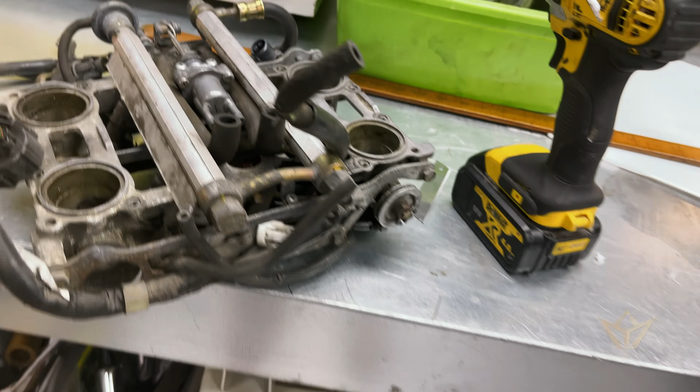Okay, we're at a turning point now with this VFR. I replaced the wax idle, which I thought could have been faulty. It just wasn't settling down in idle, so I picked up this throttle body. There was only one on eBay. Picked this one up. Luckily, the wax things you can see here, you can see they both rise, but one rises slightly more than the other. You can hear the idle now sits absolutely spot on. You can now get on with restoration. Absolutely spot on.

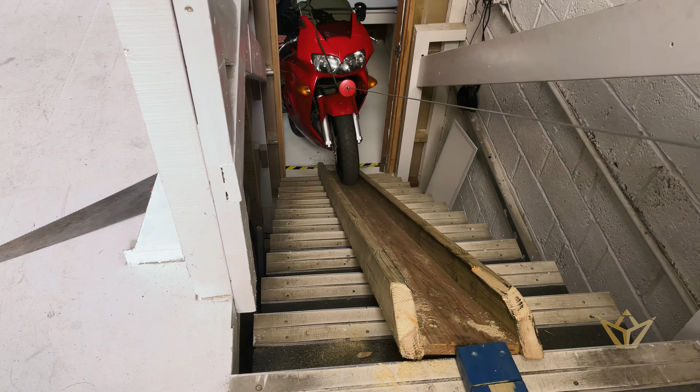This VFR is now up. There's a bit of a drama getting it up the stairs, but we've got it. So with this one, we're going to start the restoration. We're going to take the panels off, and then we're going to take the panels from the other VFR, which are there, and the tank and all that, and then we're going to do restoration all in one hit.

So while I'm doing that, I'm going to go into this one and change the oil, do the spark plugs, do all those bits, check the chain, all that sort of stuff, brake calipers, fluids, and get this bike ready to accept the new panels. And then that should be the restoration done for these two motorbikes.

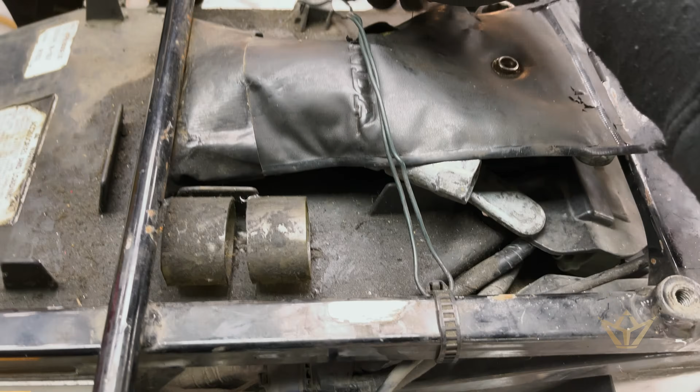So hopefully there are no horrible gremlins in here. I'm not expecting issues. So if I complain, then you can hold me to it. But I think this one should be as expected. Since 2000 it's been ridden a lot, so there will be some things worn, but we expect that. That's a bonus.

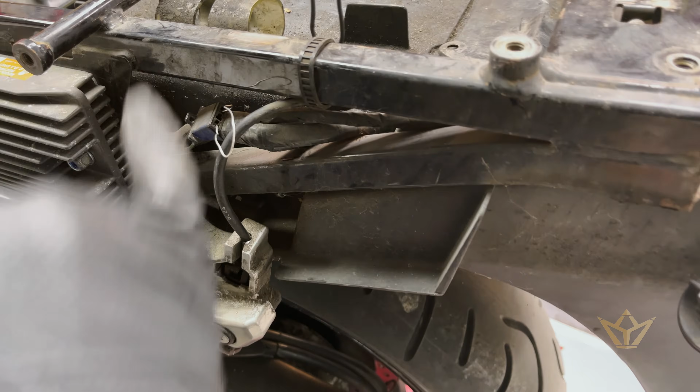Alright, I'm just going to do a code check, see what this bike's history is, and we'll clear them, and then we'll turn the power on again and see which sensors are causing any problems. One, 2, 3, 4, 5, 6, 7, 8, 9, 10, 9.

So to clear the codes, to check the new ones, we're going to turn the ignition on, quickly come here, in about 5 seconds, take one side out, put it back in within the 5 seconds, and then the FI light should flash. If it flashes, it means it's cleared the codes. I turn the ignition off, take the pin out, turn the ignition back on again, and we should see whatever we see. So there's the flashing light.

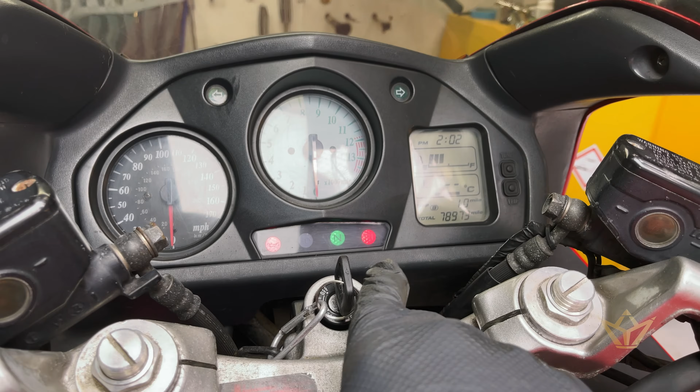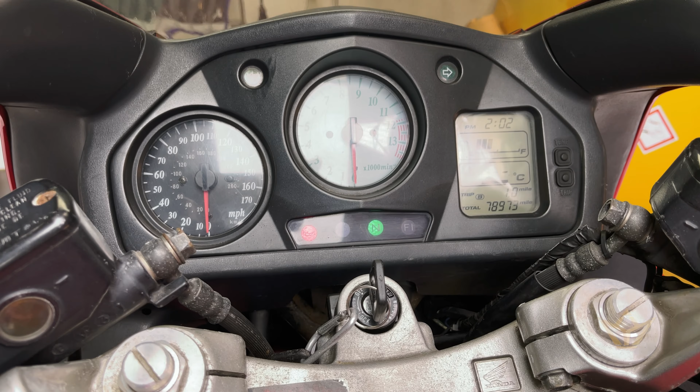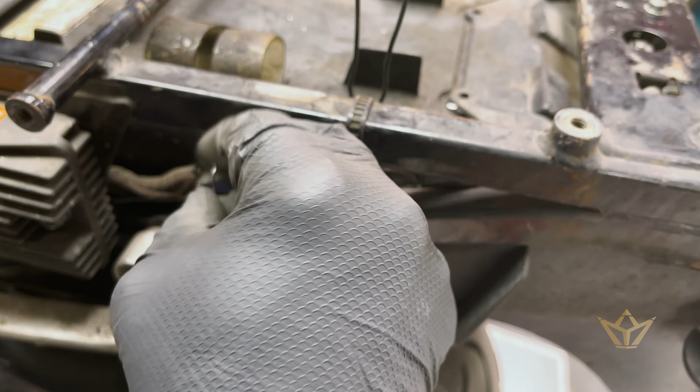So we turn the ignition off, take the pins out, and let's see what codes we have. Alright, that's cleared. So now we put the pin back in again to read what new codes we have. The error codes only show when you check the service indicator. People forget that. Unless it's a very bad issue, this is what we do to check to see where they have error codes. Right.

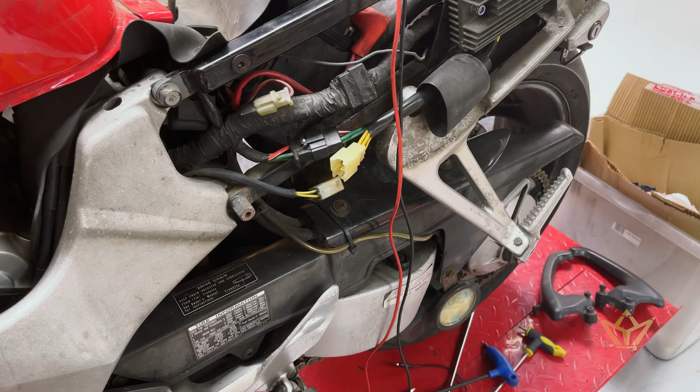Let's check now. Okay, there are no error codes. That's great news. This bike is good. Cool. But I'm just going to check the state of the stator, because on the other VFR this is still fresh in my memory, so I'm going to share this with you. We're going to do a continuity check.

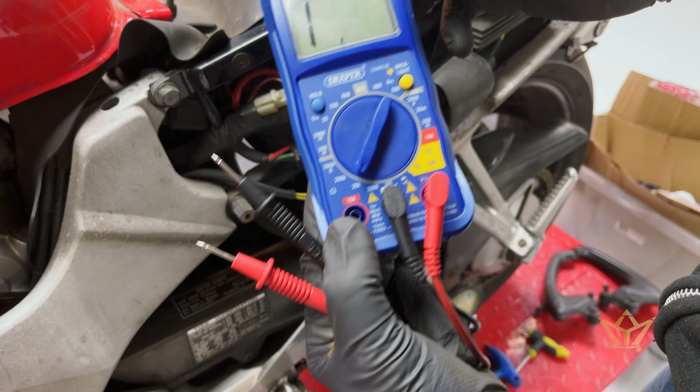So we want to put on something like that. Check one against the other. Zero, that's good. One pin against the other, that should be zero. And one pin to the other, that should be zero. Good, stator good.

The rectifier is slightly more complicated, but certainly not that complicated. I just have to say, if you really want to get into the detail of why you do the test this way, you want to go onto the YouTube channel called Kev's Shed. Kev's Shed is a really helpful guy on VFRs, and he will explain to you why we do the test this way. But for expedience sake, we just want to get on and check to see if this is okay.

So just follow. Here you can see you've got 2 greens and 2 red and whites. The 2 greens are exactly the same. Honda just doubles them up for some reason. So what we're going to do is put a crocodile clip on the green line. Any one of those greens is fine. And then we're going to check to see whether we get a current through any one of these.

On this configuration of positive going to negative on the green, for whatever reason, it doesn't matter, and you'll see in a minute, there should be no reading at all. Okay, there should be nothing. But if I swap over these and I check the same things, I should get a reading. Okay, and I should get a reading. And they should be fairly close to each other. I should get a reading.

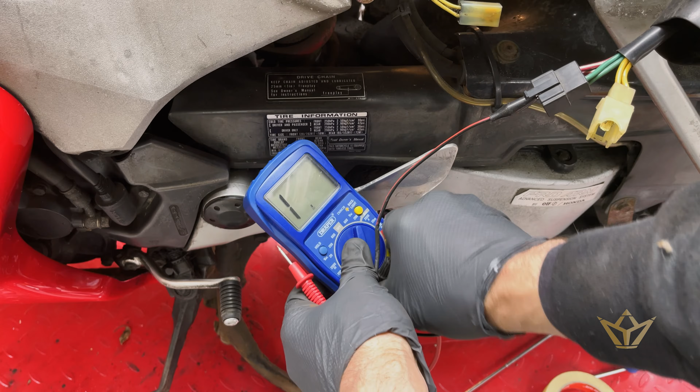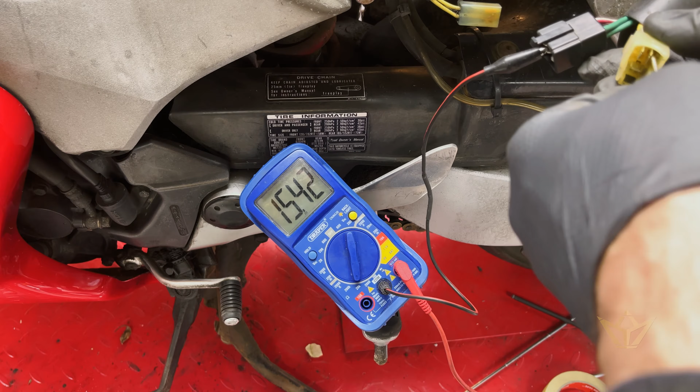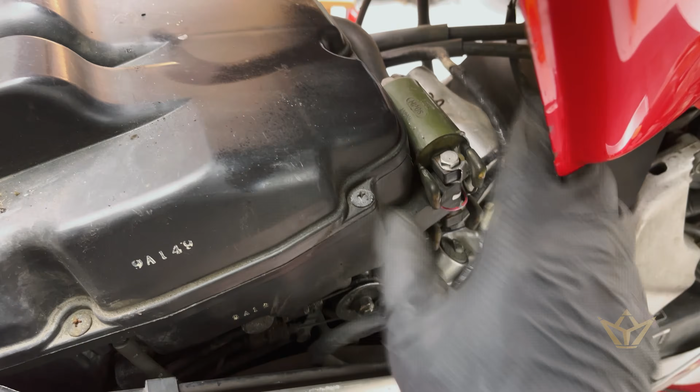You should get readings. Yes, reading, reading, reading. This regulator is all good. It's missing its little clips. So that's come off. Nice. Wow, I wasn't expecting that. Very good.

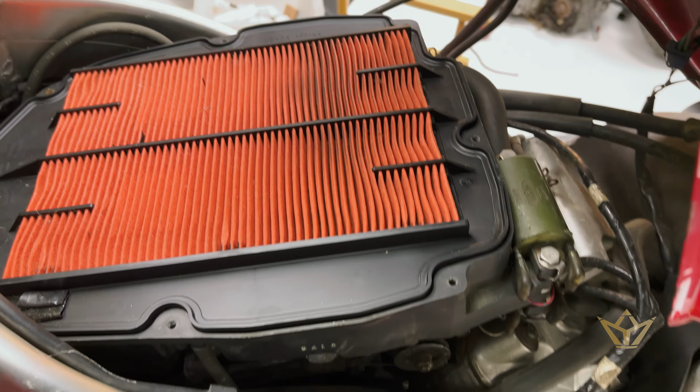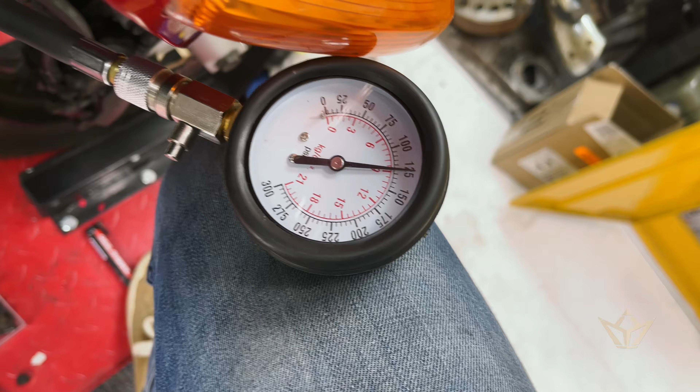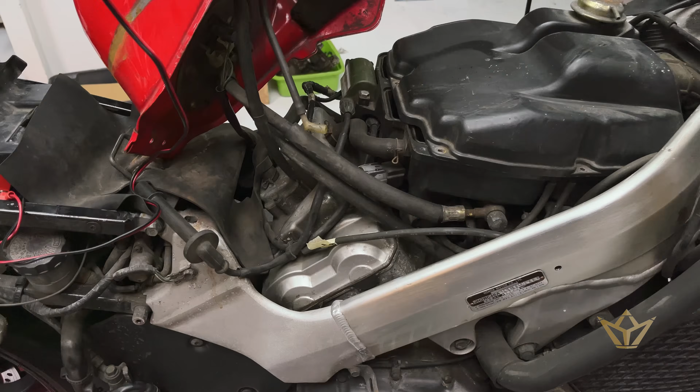Just spotted a missing vacuum. Oh man, this wasn't even screwed in properly. Look alright. Wow, that was scary. That switch didn't work. Even when I turned the ignition off, that just kept firing on.

Not good. When working on a VFR or any motorcycle as complicated as this, you really have to be pretty tenacious and brave and exploratory to be able to find some of these difficult problems that reside in these bikes. Through all the years that these bikes have been owned by different people, people have done different things in order to make them work, not necessarily the right things, and in particular the wiring.

If the wiring is being converted to work with something else, like for example this relay here, which looks just like any other relay from this particular motorcycle, when this jammed on me and the engine just kept on spinning, the issue was quite simple. The solenoid inside had, or the points had arced and then had not separated. Because as you can see here, you've got the high voltage plugs, and then you've got the switch plugs which activate the points to connect and then link the two.

If you get these two main wires crossed over, the bike doesn't blow up, but what it does do is everything just dies. Nothing switches on. Your dash lights don't go on. There's no life in the bike.

This particular shout out to a company called Motorcycle Products Limited. The owner and founder called Arnie. He had supplied me with no less than 2 starter relays, and I'd had trouble with them. I couldn't get them to work, and without any quibble he just kept sending me different ones, or the same one, and they still didn't work. So he asked me to send him a photograph. I sent him a picture. He looked at it, and with his keen eye he said that the connectors on the original solenoid, which was working on this bike until it jammed, which is the reason I wanted to replace it, were incorrect. So if I swapped the leads around, that would work. It was really nice of him to do that, instead of just asking me to send them back and refund me. He wanted to try and help me.

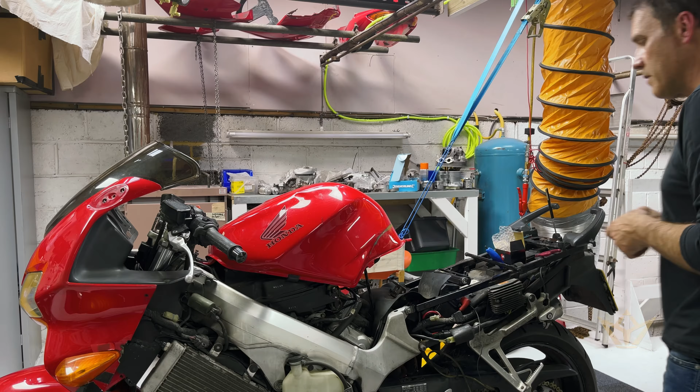So what I'm going to do now with this VFR is it's all running fine, but because I've got this off, I'm going to take the throttle body off. I'm pretty quick at it now with the other bike, so this one should be fairly easy. That's going to come off.

So I'd like to get her sweet, and then we can get on with the restoration of this one too. In fact, that doesn't slow down the restoration. It just means that these are some of the things I have to do while those panels are being painted.

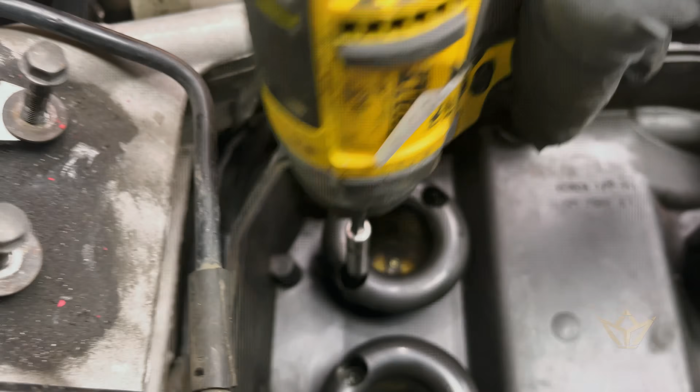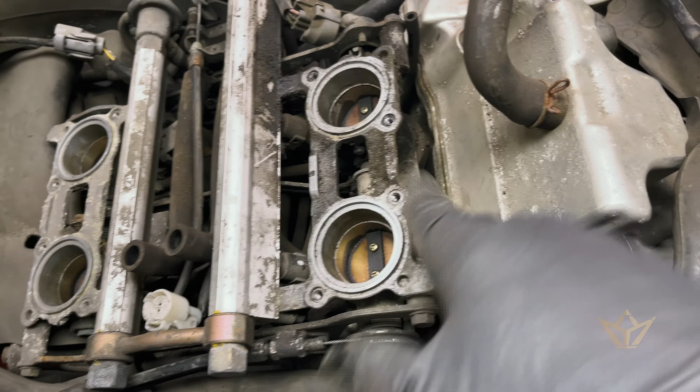This is the choke version. Well, it's not a choke, but it's an idle speed adjuster on cold. One of the ways you can get these rubbers off a little easier is by spraying some lubricant on them early. So we'll do that.

What a great riff this is. This is Fourplay. Nathan East plays with everyone.

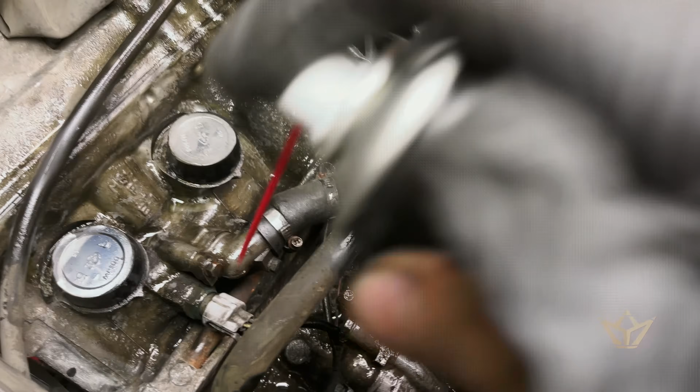Let's get back to work. I'm going to take the thermostat out because I'm here. I'm going to check all the plugs. I'm going to go through everything because I don't really want to open this up again. You know, this is just a testament to how good these VFRs are. Look at this. These are the injectors.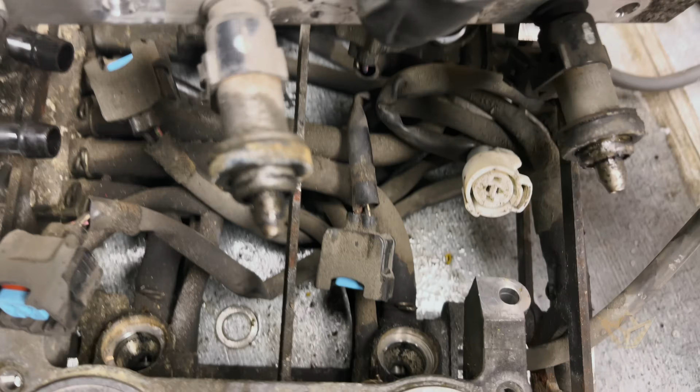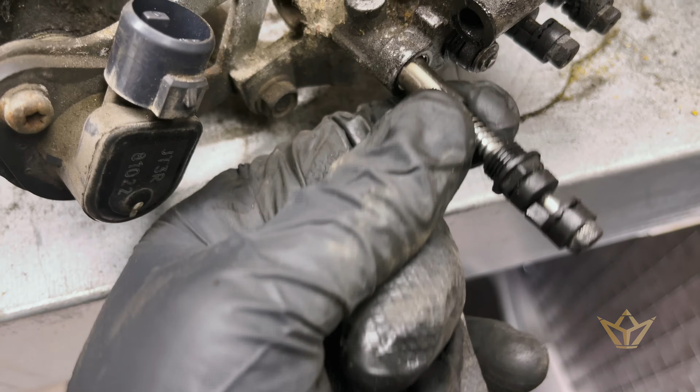This is going to be the first time I get into the idle pin. You can see they move back and forth. This feels a little sticky. Okay, so I've used a number 10 spanner, taken this first one out just to see. I always wondered whether I'd lose the setting that was on here already. But as you can see, there is a thread and a spring there, right?

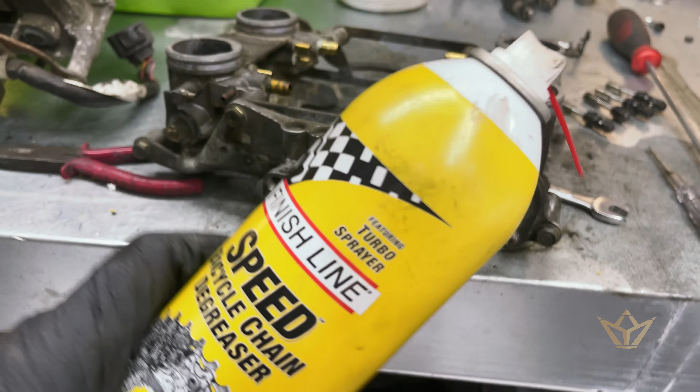This setting hasn't moved, but I'm still able to take this off. So there's your answer. You still maintain your setting. Not that you're going to keep it, because you really want to do a carb synchronization after you've done this. But this gives you an indication that you're not going to create an unstartable motorcycle by removing this. I'm going to use this degreaser, and I'm assuming by all accounts that this

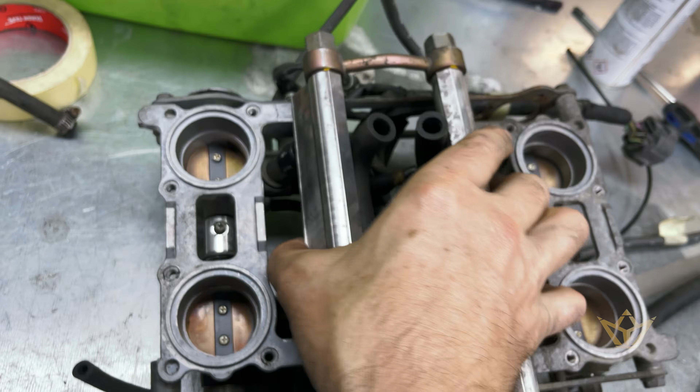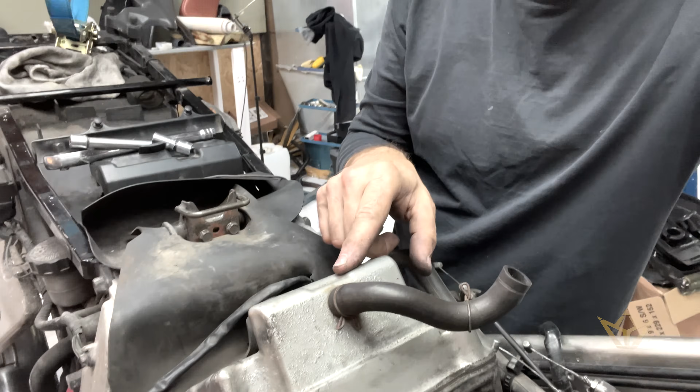We are now going to take off the head of both sides, and I'm going to do a valve check. I think we're right here at the business end. When the throttle body's on, you can't get to it. So let's do it now.

I've ordered the incredibly expensive thermostats. There are very few of them around because they're off-centered thermostats. I'm not sure if anybody can tell me where you can find a thermostat that would fit the VFR, where you could find one in the UK. Let me know, because they're about £60 or £50 each, which is quite a lot plus postage. With the seal, you're looking at £75 all round, which is more than I paid for a whole throttle body. So yeah, that's a sting right there.

But anyway, we're going to take the head off. I'm going to check the valve clearances, because I've got a suspicion that the valve clearance, particularly on one of the cylinders, is showing a low PSI, which could be the case that it's actually staying open for too long, and therefore the compression is a little lower than the others. But you should check them anyway. Correct me if I'm wrong, was it 30 or 40,000 miles on these? You should have them checked anyway.

Basically what happens is the valve seat that's inside the head, as it wears, it goes further into the head, therefore exposing the shaft itself to poke out a little bit further. So as the cam turns, that little shaft now is sticking further out and has less movement, right? And not only that, it's open for longer. Think about that, it's open for longer.

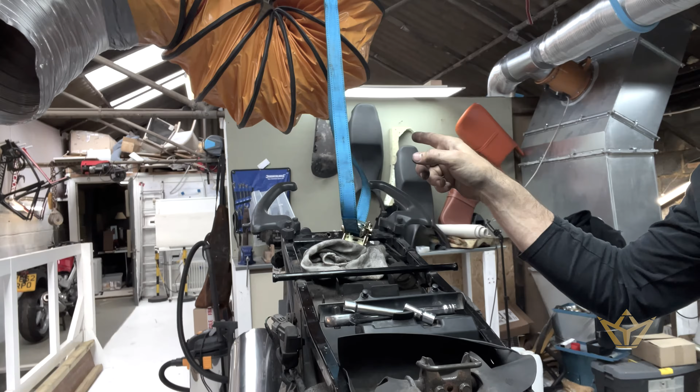No doubt these bikes will look absolutely amazing. Bear in mind, I've got one, I've got two, so there's the other one. There it is. So that was the original one I bought, and this is the one that I'm busy restoring now. So I'm a very lucky guy, I've got two VFRs.

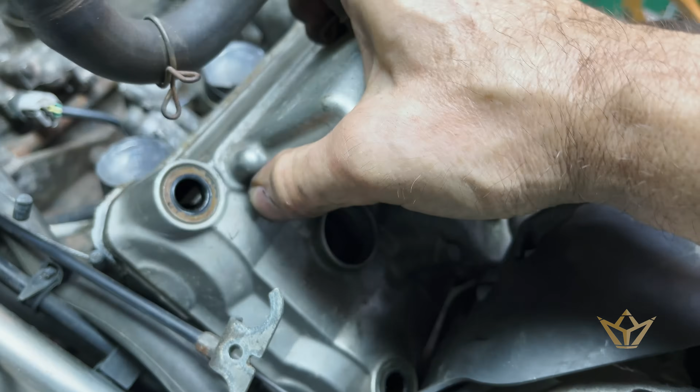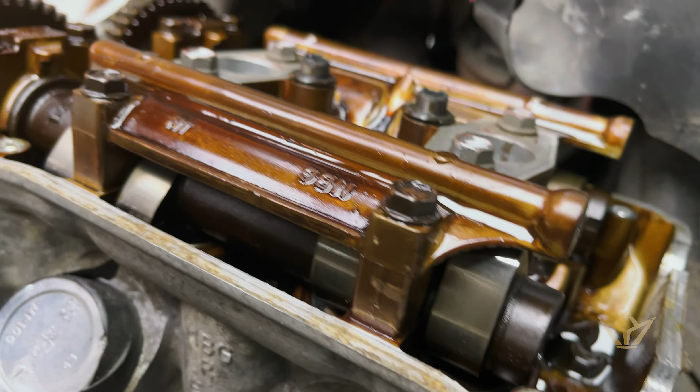This is such a beautifully made engine. Absolutely no wear on these at all. Each time I work on this bike, I fall more in love with it as I go through it. It is just superbly built. So there's the marks. That'll tell us where top dead center is for each piston.

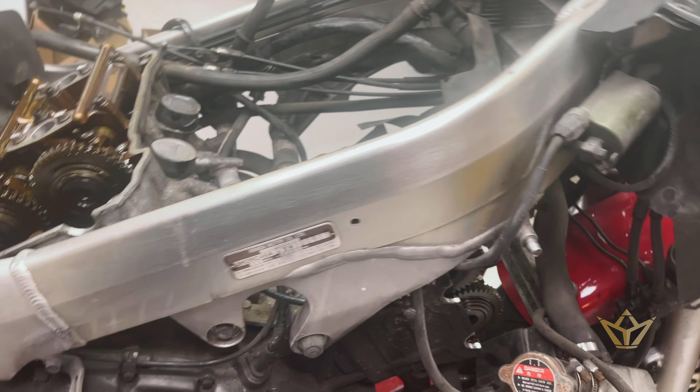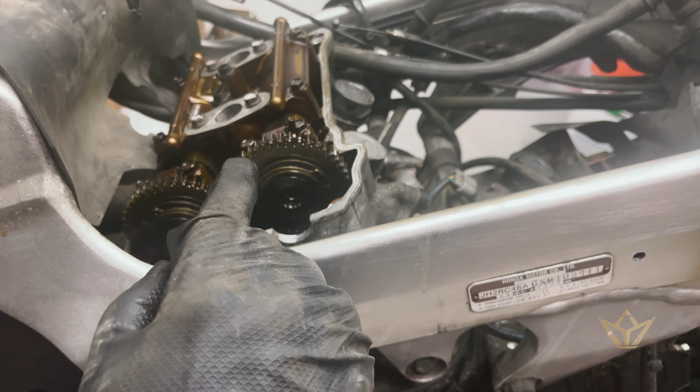So I've saved you the hassle of taking off the heads, because I think there's enough online about how you do that on the VFR, and I'm not going to go through that with you. For the purposes of this, I'm going to keep it really simple, because I found that a lot of the tutorials online are to do with the Gen 6. I certainly haven't found one on the Generation 5. And the reason why it's important to do one on the Gen 5 is because this is not the VTEC valve system, and the VTEC has a chain, and this is a gear. So there'll be slight differences to those.

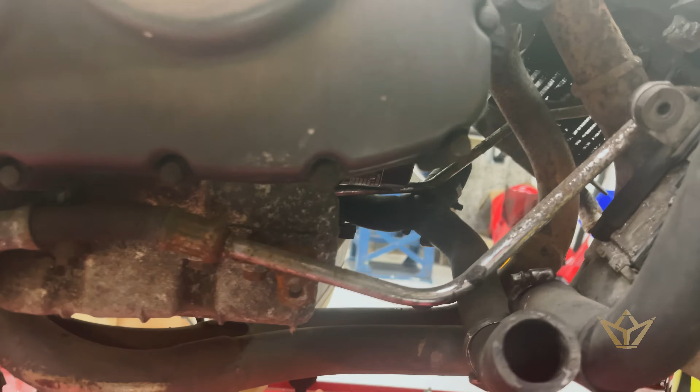So I'm going to start off now by just explaining to you what we do. It's not that difficult. It really isn't that difficult. Taking off these bits and pieces is tricky. But once you've got the throttle body off and all that, why the hell not get stuck in? So here we are. We've taken the cover off this fella here. I'm just going to shine a light on here and you'll see a whole bunch of numbers.

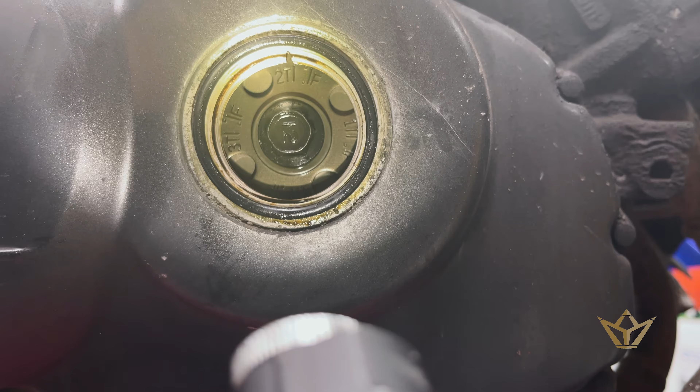Okay. So you see in this particular instance, 2T and then a line. That line is where you should be focusing. That's all you need to worry about for this particular exercise. And there you just line it up with that slot. So this is how it goes: 1, 3, 2, 4. So what we want to do is get it to top dead center.

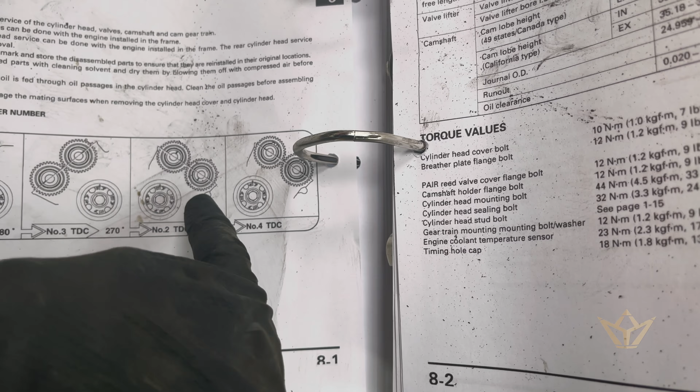Now if you look at this cryptic drawing here that they've given us, it's a whole bunch of funny little squiggles. And you'll see printed very carefully on the actual gears are little lines. Those will give you an indication of where it should be. This valve lobe is pointing up, and this one is pointing up, is now at its shallowest, which means it's going to create that little gap that we're looking for.

Okay, 4T, and that is one rotation. If you rotate it again, that same position, those lobes will be in a different position. So you've only got two goes at it. One is wrong, the other, 360 degrees up, is correct. Those lobes are pointing upwards, and according to this drawing here, the lines marked on the gears, one points this way and the other one points that way.

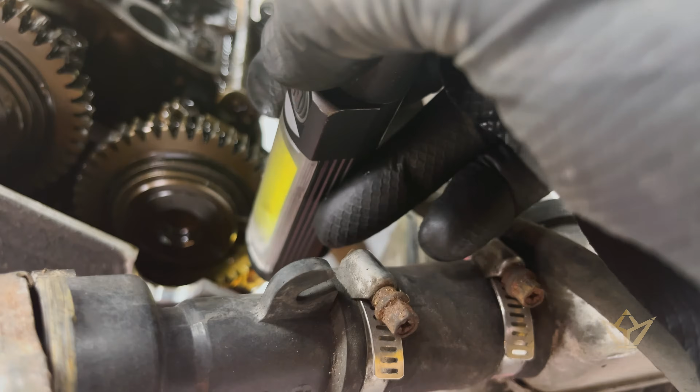There's the line there, and obviously the other line is there. Don't worry about this circlip thing. On the drawing it shows a circlip position, and sometimes that can get you confused on the manual. Just forget about those things. They will move around at will. It's those little lines that you need to mark on.

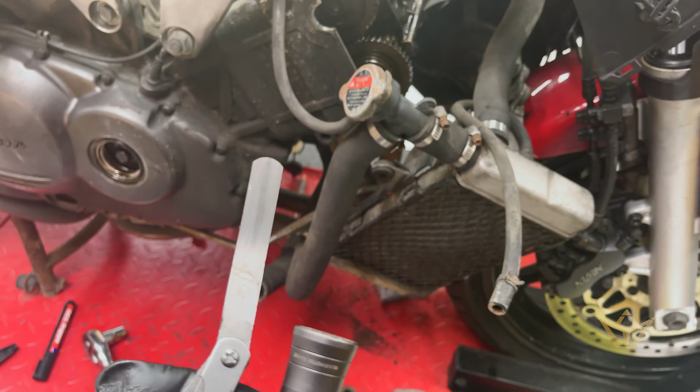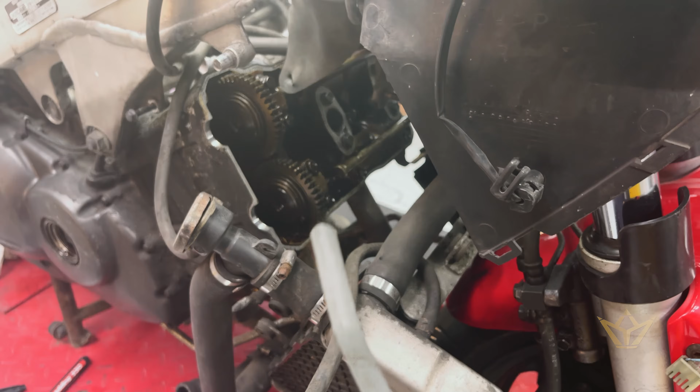So the next thing is to get the feeler gauge into that. I've put a bend in the feeler gauge so that I can get it in much easier, because what you want is the feeler gauge to go in between the bucket and the lobe. That mustn't be forced in and forced out. Likewise, it mustn't be wobbly. It's got to go in nice and smoothly when you can estimate through your instinct that that is snug. It's fitting nicely.

Now, how do I tell the difference between an exhaust valve and an inlet valve? Well, it's actually quite simple. There's your exhaust pipe, right? There's the valve for the exhaust pipe. There's the injector or carburetor, whatever you want to call it, and therefore the corresponding valve for that.

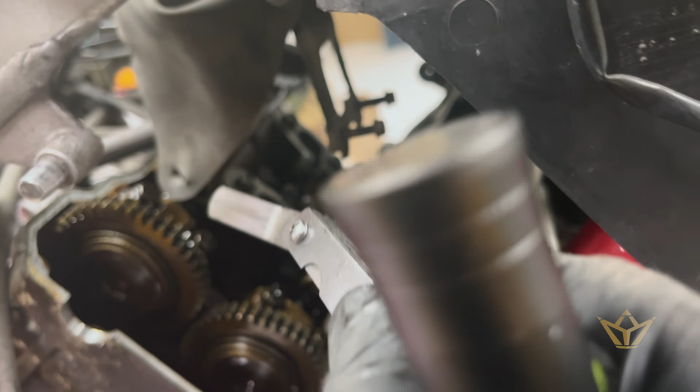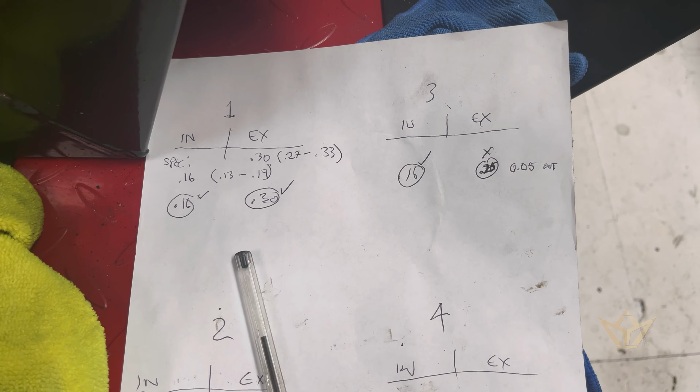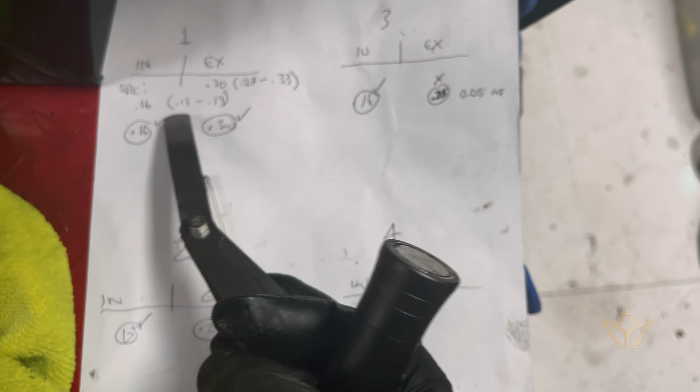So in this case, we're going to be looking for the spec here, which is in millimeters. I work in millimeters here, and it's 0.16. I don't have 0.16 on my feeler gauge, but I've got 0.15 millimeters. So that'll give me enough of an indication, because I have some tolerance allowances which keep the valve gap in spec. So I can go from as low down as 0.13 millimeters to 0.19 millimeters being the largest gap. So I'm using 0.15. That should certainly be enough within spec.

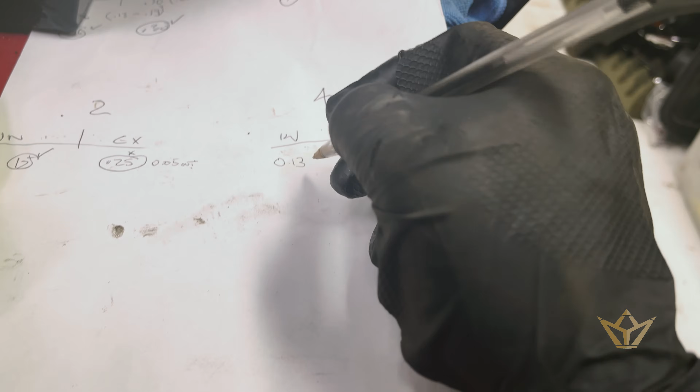You can hear it touching, and it's very snug. I'm not forcing it. It's definitely clear. That is definitely not going in. So our measurement for number 4 inlet is 0.13. Now that is in tolerance, but it's just in tolerance. I might change that out anyway, because I'm here and it's literally on its last. So I'm going to say no. I'm going to change that.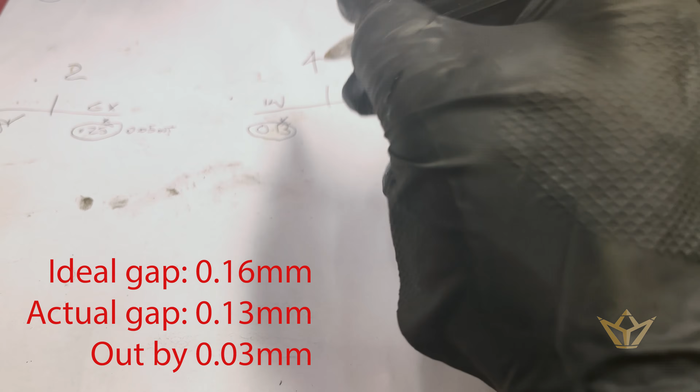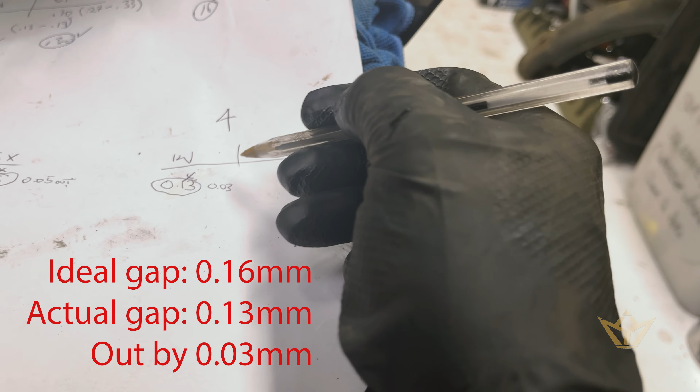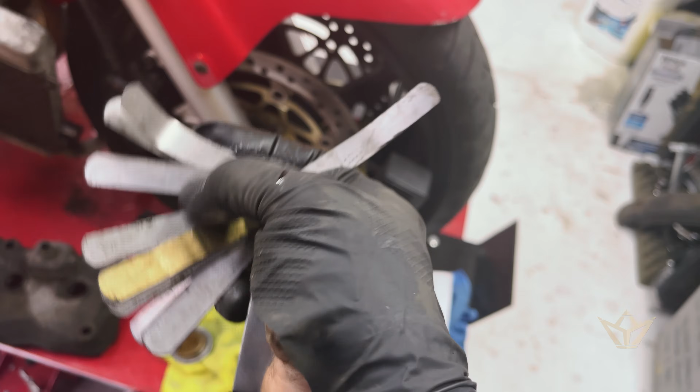What's the tolerance? Well, you can do your maths. It's very simple. It's 0.03 out, because 0.16 is the sort of medium. So 0.03 is the gap that is out. That's how much tolerance out it is. So the exhaust valve gap is always bigger. Why? Because it gets hotter. So it expands more, and that's why the gap is bigger.

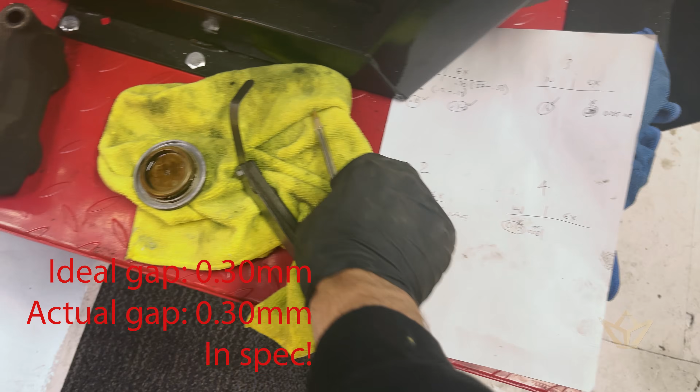Make sure you've only got one feeler gauge. I know that sounds crazy, but I have spotted sometimes I've had two very thin shims next to each other. You can see that. It's obviously jerking around. It's not because it's stiff, it's just because it's got to be absolutely lined up. There we go. See, that's 0.30, so that's well within spec. So let's look at these numbers. Let's put that down so that we remember what we did here. 0.30, which is correct.

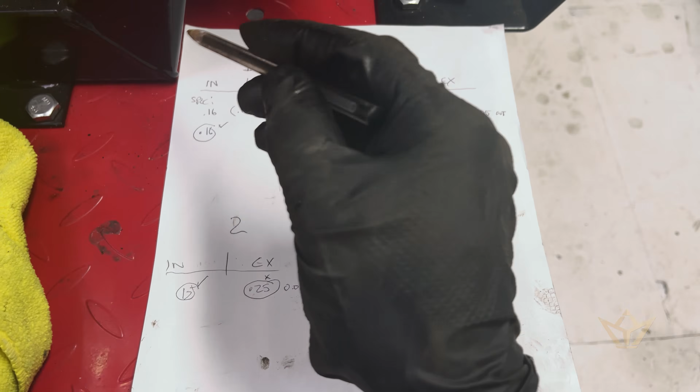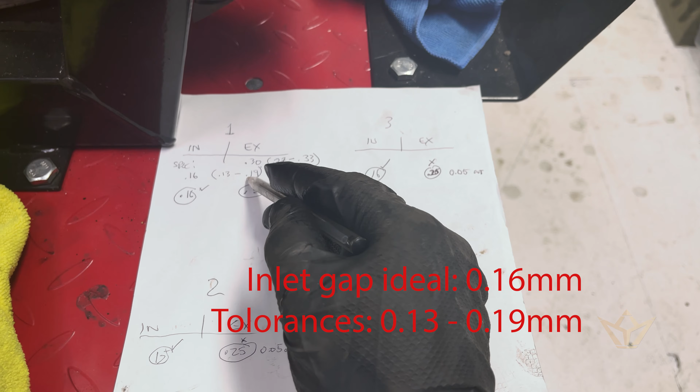Now this is my little, very simplified board. So these are my findings. The spec for the inlet valves for all four should be 0.16 millimeters, with a tolerance as small a gap as 0.13 to a largest gap of 0.19. Now you'd only be worried about that number if you get the wrong new shim put in under the bucket. But the number's almost always going to be smaller. The gap's going to get smaller because of the wear on the valve. As the valve seat wears over time, the stem pushes through and higher up against the lobe, and therefore the gap narrows. It's kind of obvious.

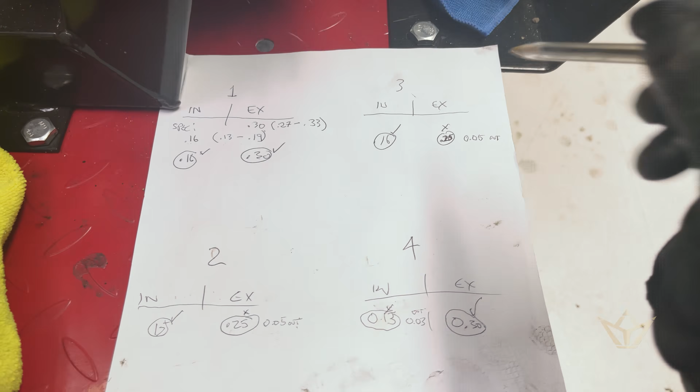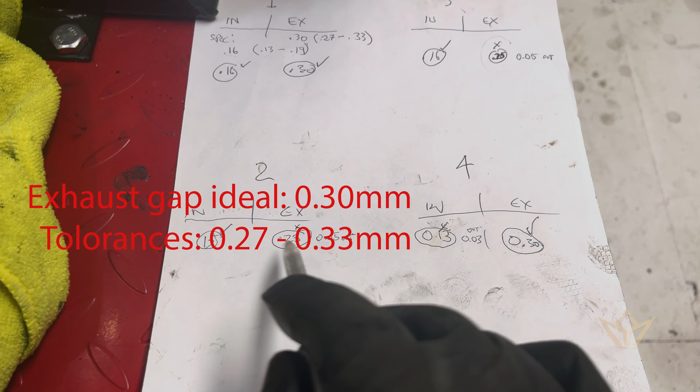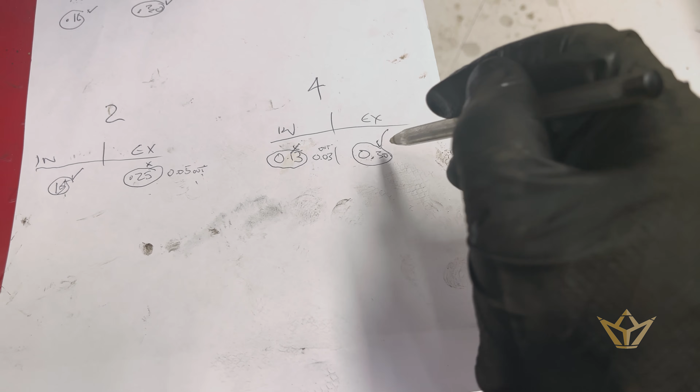So on this particular bike, cylinder 1 is in spec. Cylinder 3, which is next to it on the back bank, the exhaust valve is out. So that one is out by 0.05. On number 2, the exhaust valve is out by the same, and the inlet valve is exactly the same as 1. And on 4, my inlet valve is out, but my exhaust valve is in. So there isn't really a pattern to these. You've got to measure and check each one, and don't assume just because one bank is problematic that the others won't be or will be. You've got to check them all.